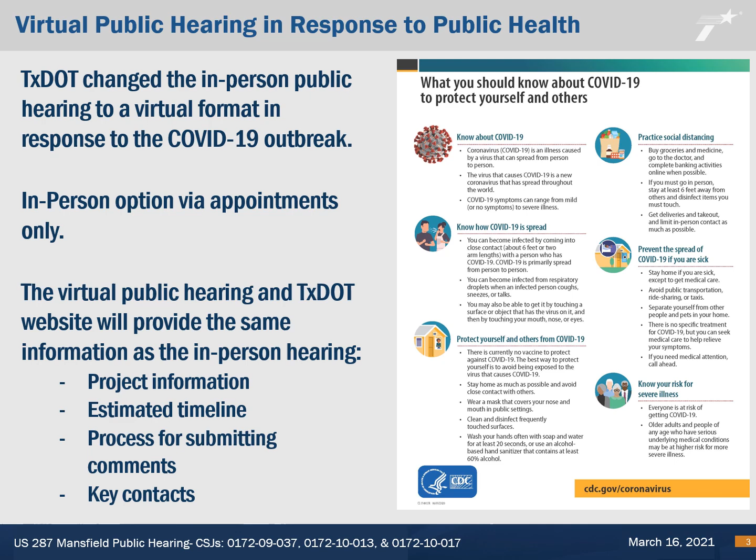This presentation will cover the same information the Fort Worth District would have shared at an in-person public hearing. However, the comment process for the virtual public hearing will be different from what we normally conduct at an in-person hearing and will be explained shortly. All project information can be found on the TxDOT website. For health and safety reasons, we encourage the public to view the project materials displayed online to avoid in-person contact.

The in-person option will be held on Tuesday, March 16, 2021 from 10 a.m. to 7 p.m. Attendance at the in-person option will be by appointment only. Individuals wishing to attend the in-person option may call 817-370-6906 Monday through Friday between the hours of 8 a.m. and 5 p.m. to make an appointment and receive further instructions regarding the in-person option.

The virtual public hearing has been convened by the Texas Department of Transportation and is being held to receive and consider comments from the public regarding the US 287 Mansfield project. You may have attended previous public hearings conducted by the Texas Department of Transportation. However, for the benefit of those of you who have never attended one, I would like to explain why and how the department conducts a public hearing.

A public hearing has four essential purposes. First, inform the public of the status of planning for the project and present the recommendations based on studies performed to date. Second, describe the project so those attending can determine the project's potential to affect their lives and property. Third, provide the public an opportunity to see information and express their views at this stage in the planning process, when flexibility to respond to comments still exists and before location and design decisions are finalized. And finally, develop a record of public views and participation to accompany recommendations for subsequent decisions.

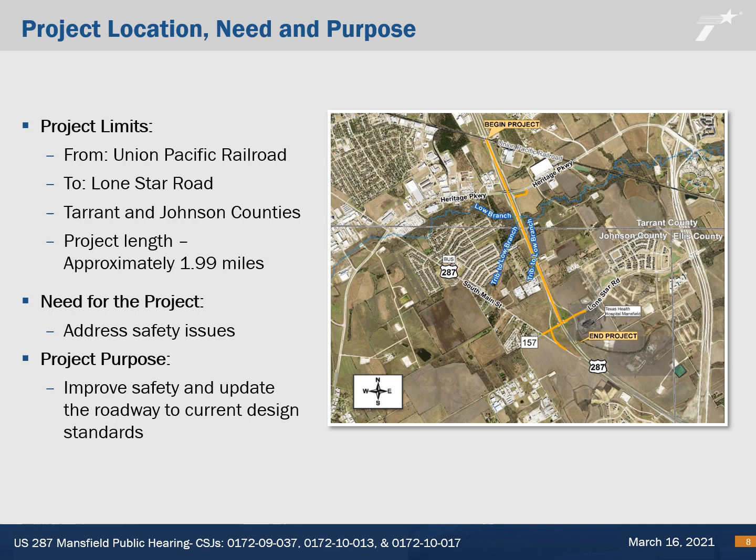The proposed project is needed because the existing US 287 south of Broad Street in Mansfield is currently operating as a freeway from a speed and traffic volume standpoint, but without the safety improvements that a limited access freeway provides. There is a safety issue in that adjacent property owners have direct driveway access to the main lanes. This project will address these safety concerns by completing this facility to operate as a limited access freeway. Adjacent property owners will have driveway access to the frontage roads instead of the main lanes. The purpose of the proposed project is to improve safety and update the roadway to current design standards.

The existing US 287 roadway consists of two 12-foot wide main lanes in each direction, with 4-foot wide inside shoulders, 10-foot wide outside shoulders, and a 64-foot wide median. The typical right-of-way width is approximately 400 feet.

Discontinuous frontage roads are located at the Heritage Parkway interchange. Heritage Parkway connects to the frontage roads by jug handle connections. The frontage roads consist of two 12-foot wide lanes and one 12-foot wide inside auxiliary lane in each direction, with 8-foot wide inside and outside shoulders.

US 287 entrance and exit ramps at the Heritage Parkway frontage roads and at Lone Star Road consist of one 14-foot wide lane with 2-foot wide inside shoulders and 8-foot wide outside shoulders. The existing Lone Star Road at the southern project terminus consists of one 12-foot wide lane in each direction, separated by a 0 to 64-foot wide median.

Near the northbound US 287 frontage road intersection, the roadway transitions into one 12-foot wide westbound lane with a 12-foot wide dedicated right turn lane at US 287 and one 12-foot wide eastbound lane.

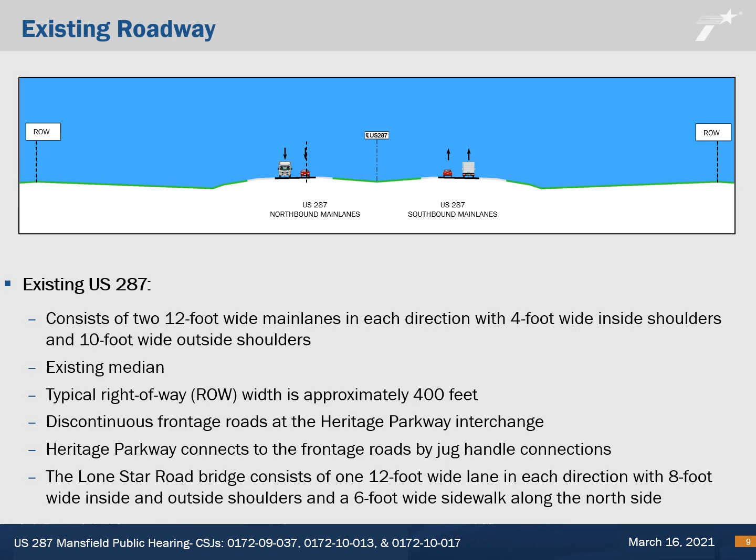The proposed project consists of the construction of US 287 frontage roads, northbound and southbound, within existing right-of-way, from north of Heritage Parkway to south of the Union Pacific Railroad (UPRR), and from south of Heritage Parkway to south of Lone Star Road. Bike lanes would be included along the frontage roads to accommodate cyclists.

Continuous sidewalks would be constructed along the frontage roads to accommodate pedestrians, as well as curb and gutter and drainage structures, some of which would require additional easements of 0.13 acre.

Auxiliary lanes would be added between the entrance and exit ramps along US 287 main lanes and frontage roads in both directions between UPRR and Lone Star Road. The existing southbound exit ramp and northbound entrance ramp between Heritage Parkway and Lone Star Road would be relocated to the north to accommodate the new U-turn bridge.

New denial of access would be required, and no driveways or proposed roadways would be allowed from the adjacent properties to the frontage roads near the relocated ramps.

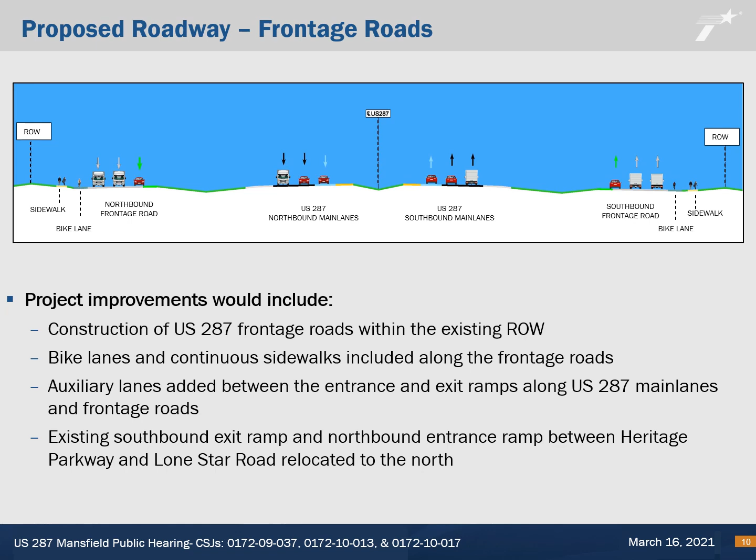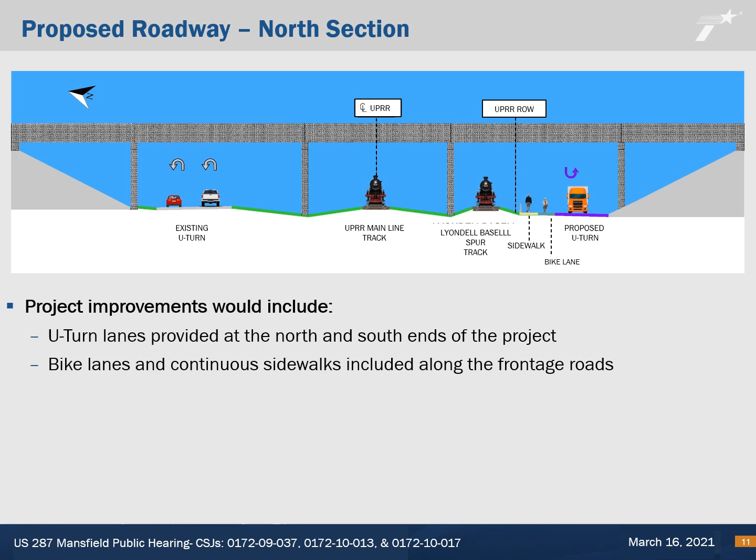U-turn lanes would be provided at the north and south ends of the project. Bike lanes would be included along the frontage roads to accommodate cyclists. Continuous sidewalks would be constructed adjacent to the frontage roads and U-turns to accommodate pedestrians, as well as curb and gutter and drainage structures.

Lone Star Road would be reconstructed and widened from 2 lanes to 6 lanes, from Business 287 South Main Street to the main driveway leading to Texas Health Mansfield.

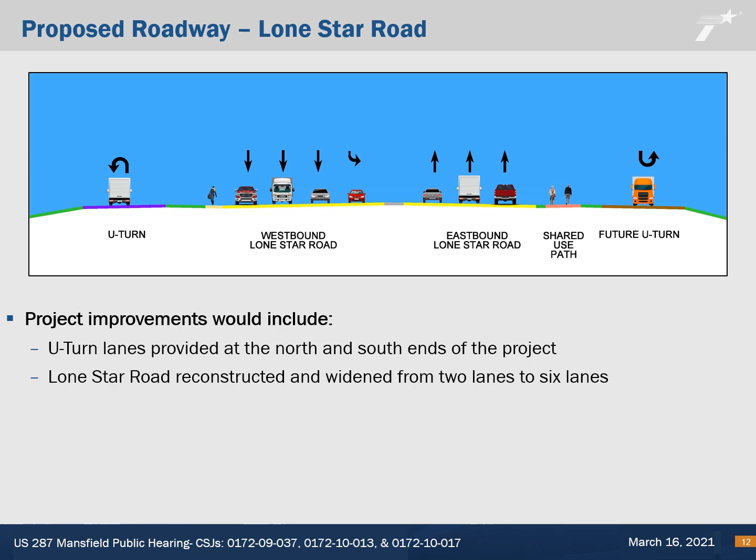A new Lone Star Road bridge would be constructed over the US 287 main lanes for eastbound traffic, and a new bridge would be added to accommodate the U-turn lane. The existing bridge would accommodate westbound traffic and would be raised to meet current vertical clearance criteria. Along Lone Star Road, a shared use path would be constructed on the new eastbound bridge to accommodate pedestrians and bicyclists.

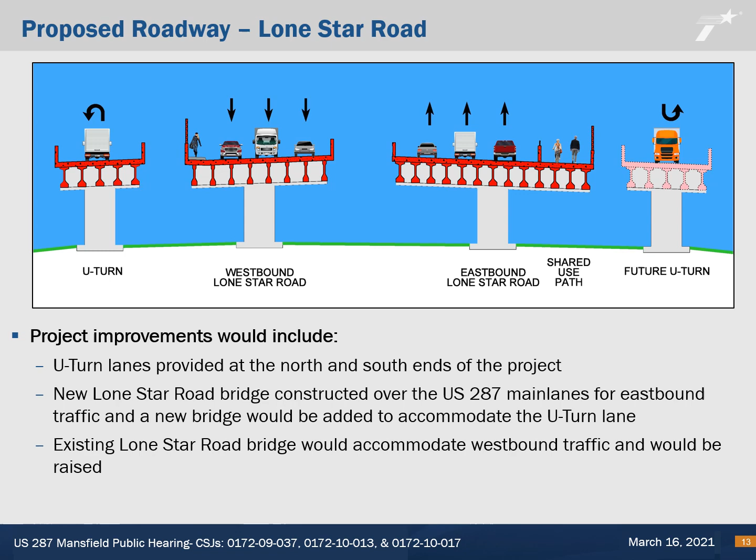Utility adjustments and relocations throughout the corridor would be required prior to construction. The adjustments and relocation of any utilities would be managed so that no substantial interruptions would occur.

The US 287 Mansfield project is anticipated to be awarded for construction in late 2021 and will take approximately 2 years to construct. The total estimated cost for the entire project is approximately $35.5 million. The project is currently partially funded.

This concludes the project information and design portion of the presentation. The next few slides will provide an overview of the environmental evaluation for the proposed US 287 Mansfield project.

Prior to December 16, 2014, the Federal Highway Administration, or FHWA, reviewed and approved documents prepared under the National Environmental Policy Act, known as NEPA. However, on December 16, 2014, the Texas Department of Transportation assumed responsibility from FHWA through a Memorandum of Understanding to

review and approve certain assigned NEPA environmental documents. This Memorandum of Understanding between TxDOT and FHWA was updated on December 9, 2019. The review and approval process applies to this project.

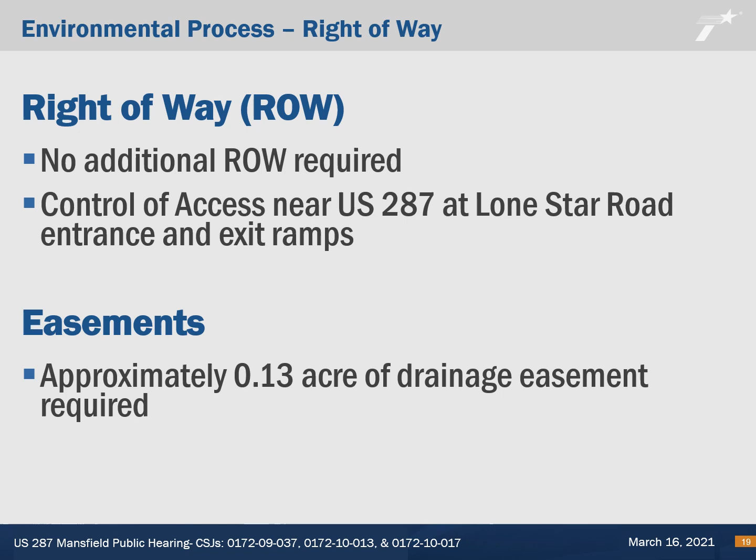Bicycle and pedestrian accommodations were considered during the environmental process. Bike lanes would be included along the frontage roads to accommodate cyclists. These sections would consist of a 2-foot bike lane buffer and 6-foot bike lane. Continuous sidewalks would be constructed adjacent to the frontage roads to accommodate pedestrians. The sidewalks would be 6 foot wide.

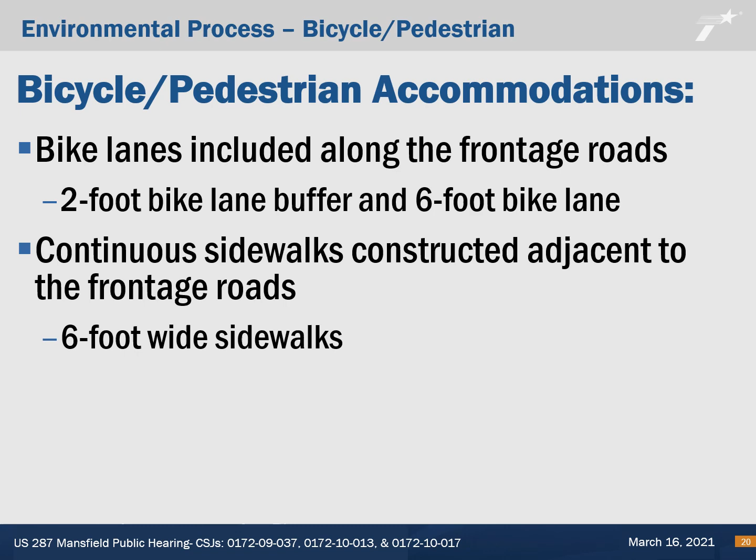Along the new eastbound Lone Star Road Bridge, a 12-foot wide shared use path on the south side of the roadway will be constructed. The shared use path and traffic lanes will be separated by a concrete traffic rail and will have 2-foot wide railing offsets.

The proposed eastbound Lone Star Road east and west of the proposed Lone Star Road Bridge over US 287 will consist of a 12-foot wide shared use path on the outside of the shared use lane.

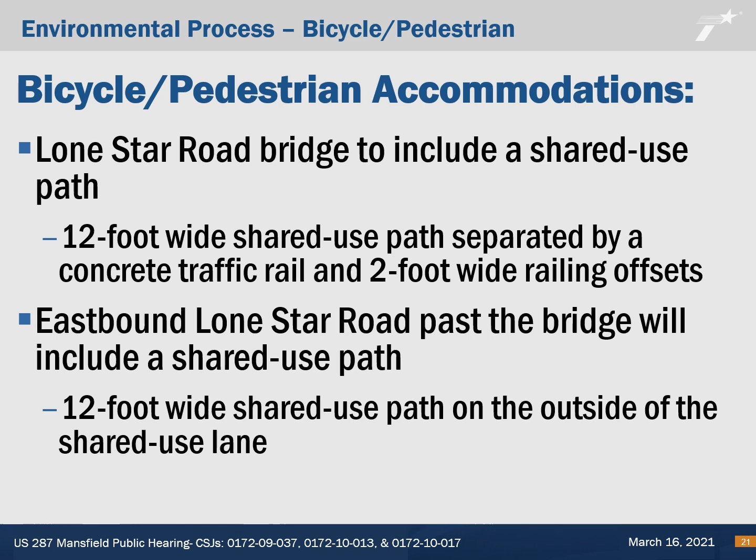The project would have direct impacts on 1.8 acres of riparian, 0.3 acre of disturbed prairie, and 119.8 acres of urban vegetation. Out of the 125.1 acres of vegetation present, 121.9 acres of vegetation would be impacted.

There is suitable habitat present within the proposed project area, and the project may impact the following species of greatest conservation need: Strecker's chorus frog, Woodhouse's toad, western burrowing owl, American badger, eastern spotted skunk, long-tailed weasel, mink, swamp rabbit, eastern box turtle, slender glass lizard, Texas garter snake, tree dodder, timber canebrake rattlesnake, western box turtle, Shinner's sedge, and 13-line ground squirrel.

There is also suitable habitat present within the proposed project area, and the project may impact the following state-threatened species: the Louisiana pigtoe, sandbank pocketbook, and the Texas heelsplitter. A mussel survey is anticipated prior to construction.

Water resources throughout the project area were considered. A total of 0.298 acre are anticipated to be permanently impacted and 0.253 acre temporarily impacted out of a total of 1.172 acres of water bodies and wetland features within the project area.

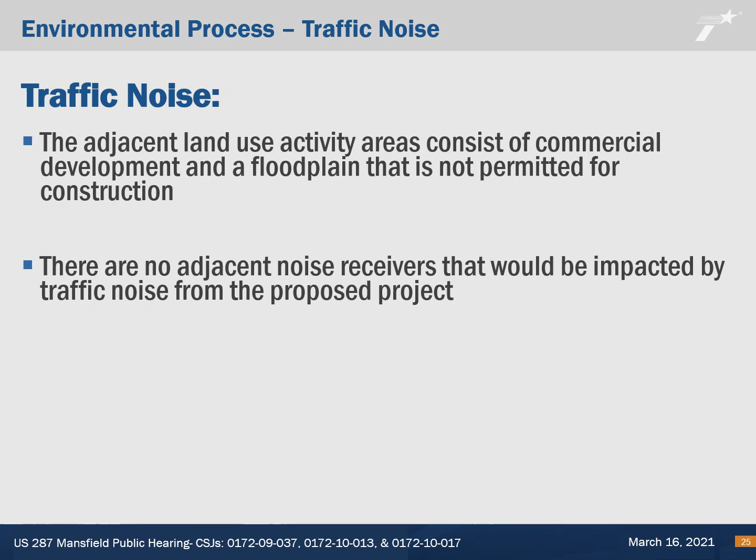A North Central Texas Council of Governments congestion management process form was completed for the proposed project. This form provides information on alternative strategies to help alleviate congestion and enhance mobility throughout the area.

The existing US 287 corridor deficiencies include alternative roadway infrastructure, which includes frontage roads, and modal options, which include bicycle/pedestrian options. The proposed US 287 Mansfield project will reduce these deficiencies with the proposed construction of frontage roads, shared use path, bicycle lanes, and sidewalks.

An air quality resources technical report was completed. It was determined that due to the average annual daily traffic for the estimated time of completion and the design year being below 140,000, it is unlikely that carbon monoxide, also known as CO, would increase. It was also determined that this project would generate minimal air quality impacts for Clean Air Act criteria pollutants and has not been linked with any specific mobile source air toxic, or MSAT, concerns.

During the construction phase of this project, temporary increases in particulate matter, or PM, and MSAT emissions may occur from construction activities. Dust control measures will be utilized throughout construction in order to minimize emissions.